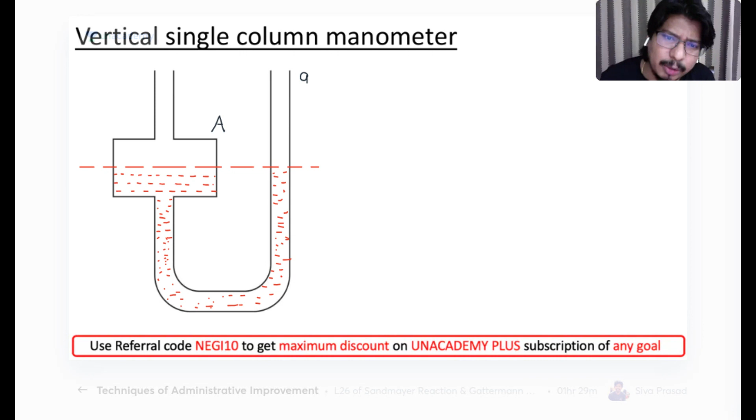Both limbs means on the right hand side limb and in the big reservoir. The moment I use the term reservoir, what is the meaning of this? Let me say the area of this reservoir is capital A, and the area of this right side U-tube limb is small a. So small a is very small as compared to capital A. What is small a? I will tell you that too.

Look here, friends. Let me say this diameter is d. Then small a will be equal to pi by 4 times small d square. It can be anything - I'm assuming I'm having a cylindrical right limb, so it will be pi by 4 d square.

Now listen carefully, from here the concept will start. Look here - let me say this distance is x. So whenever we are manufacturing this vertical single column manometer, we are aware of this x.

This initial level, you know. Once you know this initial level, you can easily measure how much x will be. So x is fixed - remember, x is not variable. This x is the distance of the top level from the manometric fluid level in the reservoir. So this x is fixed, don't worry about it.

Now let us see how we are going to measure the gauge pressure with the help of this vertical single column manometer. For that, let us try to attach this vertical single column manometer to the pipeline. So when attached to the pipeline, it looks like this.

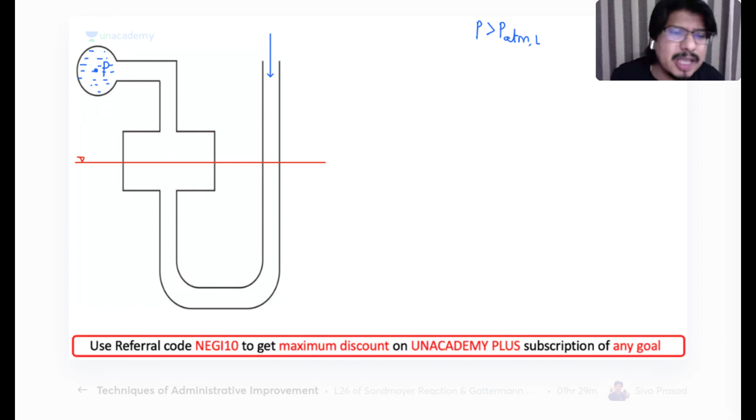Let us suppose I'm talking about positive gauge pressure. The fluid which is flowing in the pipe has pressure P, and from here I'm having local atmospheric pressure. My question is simple: if P is greater than P atmospheric local, what will happen to the manometric fluid in the right limb? Will it rise or will it fall?

One student says fall, but actually the pressure is more here, so on the right limb it will rise. The manometric fluid in the right limb will rise.

So this has risen. Let's suppose it rises, and let me say this rise is h. Fine, now listen carefully.

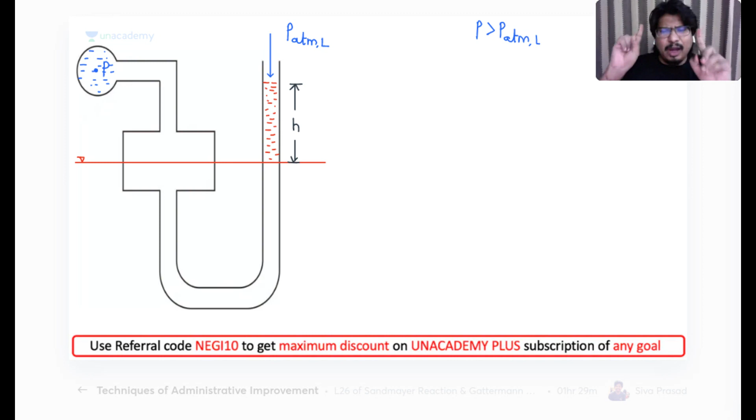What will happen to the level of manometric fluid in the reservoir? What will happen in the reservoir? Yes, there will be some fall.

Let me say the new level is like this. There will be some fall. Listen carefully, I hope you are able to recollect.

This distance was x, this distance was x, which is fixed from the initial level I'm taking. I hope you are able to recollect this is x.

Now listen carefully, my friends. The manometric fluid will now be like this.

In this final position, when the vertical single column manometer is getting attached to the pipeline, what is happening on the right limb? The manometric fluid is rising, whereas in the case of the left side reservoir, manometric fluid is falling.

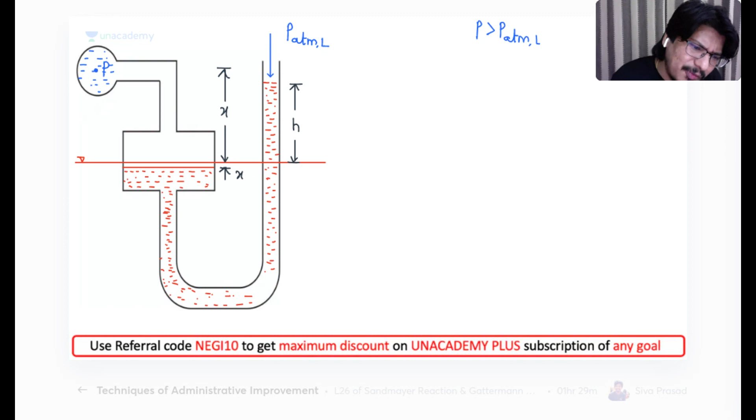A little fall, we will see that. And of course, now what will happen? Here I will be having this flowing fluid. Now you'll be having this flowing fluid only.

Now listen carefully, please try to understand what I'm saying. I want to measure what is the value of gauge pressure, so I have to draw one reference plane.

Anyone in the class, where will the reference plane come? Yes, it will be somewhere here. This is your reference plane.

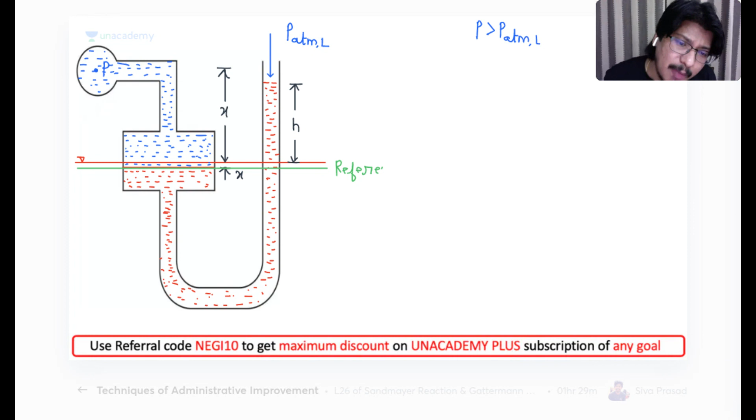Now you tell me one thing. Can you tell me whatever the volume rise I'm having?

Look here, this manometric fluid rise is taking place. What is the relation between this volume rise and this volume fall from the initial level? They will be same, they will be equal.

Yes, so volume rise is equal to volume fall. What is the volume rise? Small a into h. What is the volume fall? This reservoir has cross section area capital A into what?

Instead of x, this is delta h. So the volume fall is capital A into delta h.

Now can I say from here one thing? Can I say delta small h is equal to small a divided by capital A, into h? Now can I say one thing?

Small a is very less as compared to capital A. Can I say that? Yes, excellent, beautiful. I want everyone to type this.

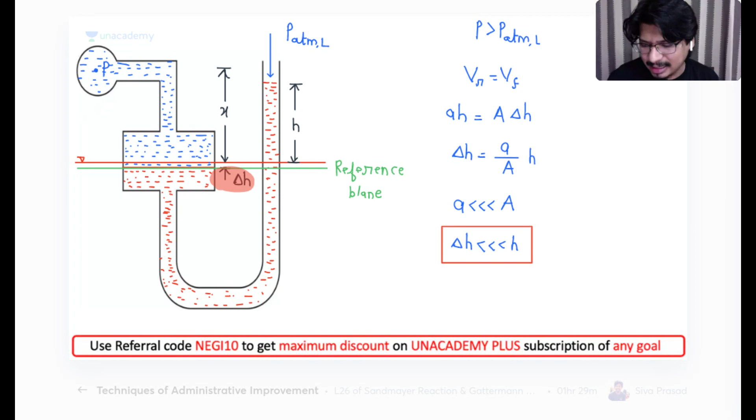Now pay attention. Now I'm taking 2 points. I'm taking 1 point in this reservoir at the interface, and I'm taking another point here on the right limb.

If the pressure at point 1 is P1 and the pressure at point 2 is P2, what will be the relation between P1 and P2? Yes, they will be equal. So I can write P1 is equal to P2.

Can anyone in the class tell me what will be P1? Think carefully and answer me. Look here, pressure is P here, pressure will be P here, due to this column of the flowing fluid.

I have told you clearly, we will be taking the density of the flowing fluid as rho f, and the density of the manometric fluid as rho m.

So tell me, P1 will be equal to what? P1 will be equal to P plus pressure due to this column up to point 1. So what is the length of this column of the flowing fluid up to point 1? It is X plus delta H. Don't neglect delta H right now.

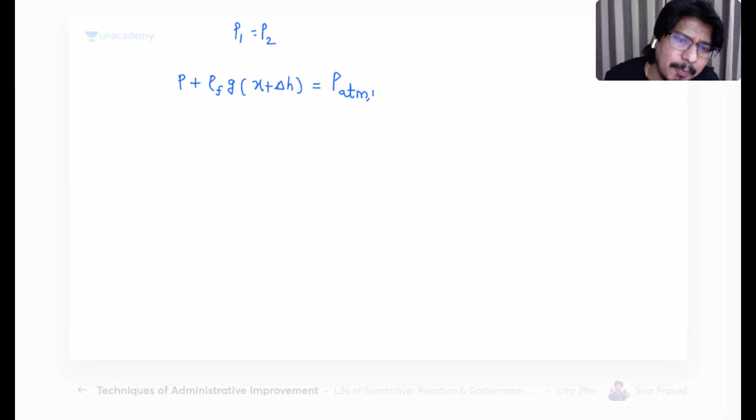So how much is the length of this manometric fluid? It is H plus delta H. So what I'm getting is P atm local plus rho m g times (H plus delta H).

So if I want to find gauge pressure, it will be P minus P atm local. These questions they ask in GATE exam and Engineering Services exam, so be careful. So P minus P atm local is equal to rho m g (H plus delta H) minus rho f g (X plus delta H).

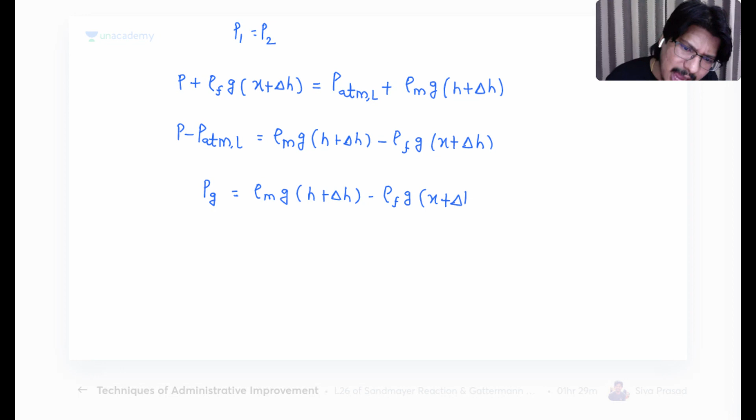So the exact reading of the gauge pressure is rho m g (H plus delta H) minus rho f g (X plus delta H). I hope everyone is clear with this exact reading.

But in industry, they are not following this. They are saying we are happy with a little bit of error, no problem, we just want only one reading to work with, not multiple readings. Then I told them: go and tell them to neglect delta H, since delta H is already very small.

So neglecting delta H, what is the gauge pressure reading now? It becomes rho m g H minus rho f g X, since they are neglecting delta H. Now they are very happy.

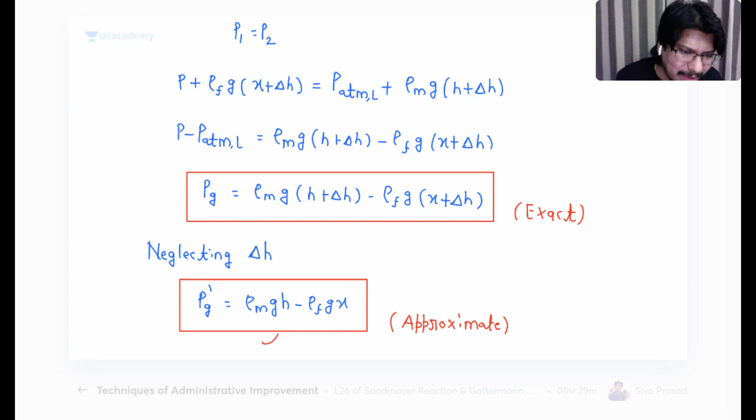Can you tell me, for measuring the approximate gauge pressure, what is the only reading required? X is already known, so you need only and only one reading. There is only a single reading required.

I need, you already know X. You need to take the reading of H only.

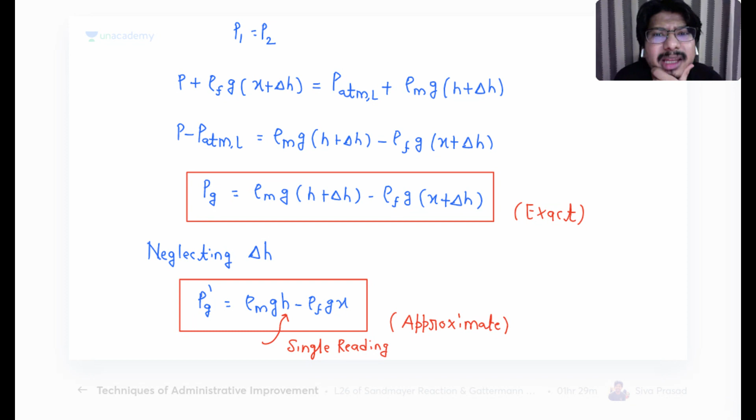The industry people got a bit doubtful. Small error means what? How much error? I don't know anything, he came running to me. Negi sir, they are asking how much error. What can I say? Then I told, no problem, Pritam Pyare.

Give me 1 hour, I will be telling you how much percentage error. I started thinking, yes Pritam Pyare, the solution came. How to find the percentage error, Pritam Pyare? I will be telling you, you just tell the same thing to them. So how will we find the percentage error?

See, how much will be the error? Error is actual gauge pressure. If you see, error will be how much? Actual gauge pressure minus approximate gauge pressure. Okay, how much is the actual gauge pressure?

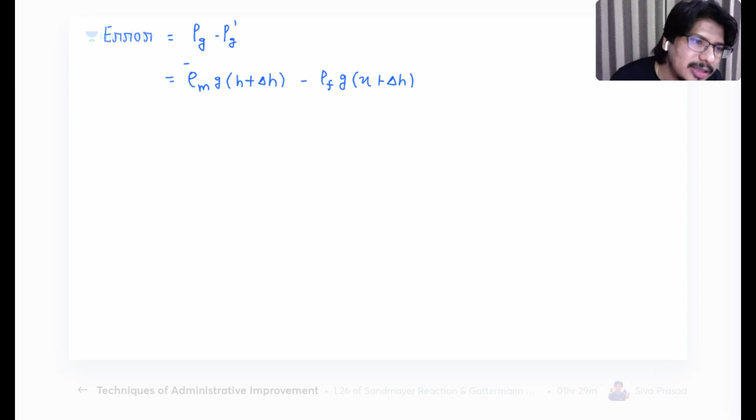Rho m G H plus delta H, rho m G H plus delta H minus rho F G X plus delta H. This is the actual gauge pressure minus what? Approximate gauge pressure: rho m G H minus rho F G X.

This is the approximate gauge pressure. So of course we can easily calculate how much is the error. How much will be the error, my friends? Can you tell me? This will be getting cancelled, this complete will be getting cancelled with this X and H only.

So what I'm getting? Error is equal to rho mg delta H minus rho fg delta H. So the error is rho m minus rho f, g delta H.

Now if you want to find percentage error, see how percentage error will come out. Error divided by what? Error is rho m minus rho f, g delta H, divided by the actual reading. How much is the actual reading? Rho m g H plus delta H, minus rho f g X plus delta H, into 100.

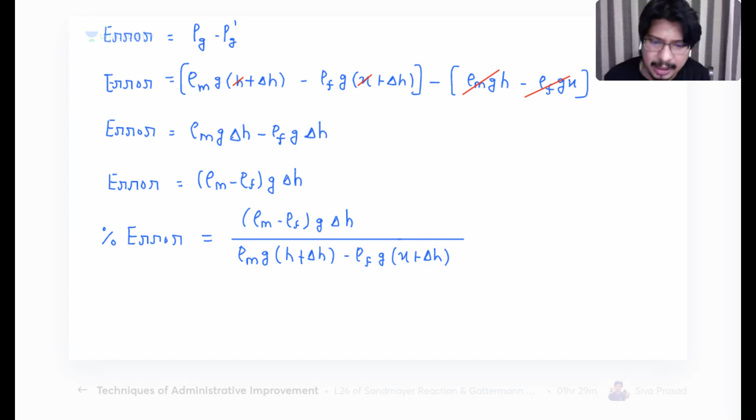And that's how you are finding the percentage error. I hope everyone is clear with this. This is the exact value of percentage error.

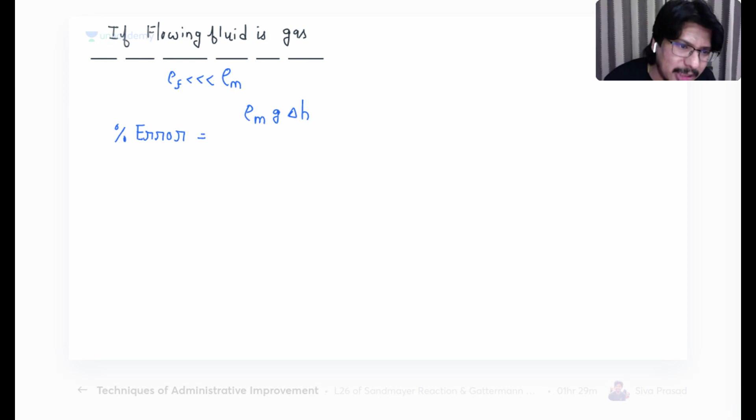Tell me, is it understood? Rho m g delta h divided by what? Rho m g h plus delta h.

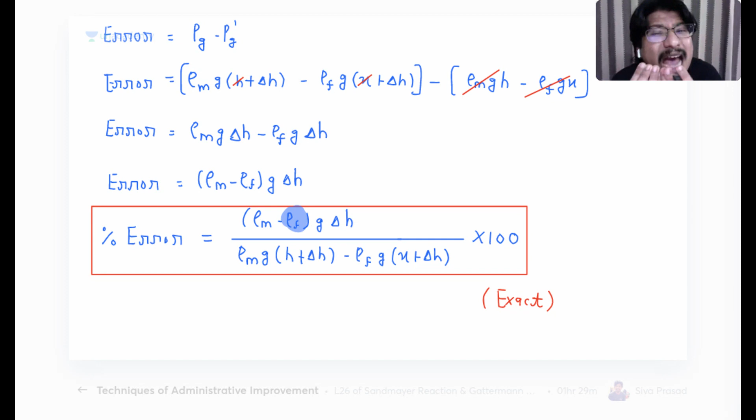You can observe one beautiful thing. Look here. Since flowing fluid is gas, it will be having very negligible density compared to the rho m manometric fluid density. So this gets neglected, so I'm getting rho m g delta h divided by rho m g h plus delta h. So what is happening here? Rho m g gets cancelled. So the percentage error is how much? Percentage error I'm getting as delta h divided by h plus delta h.

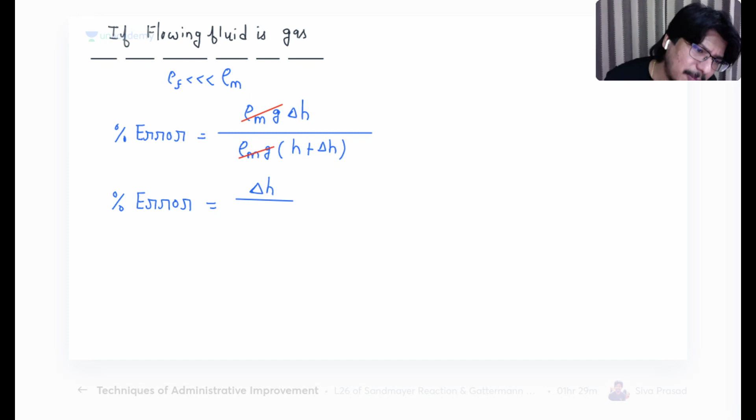And this formula of percentage error for the gas is almost exact. This is, I will say, almost exact.

Now I can do one more thing. Please understand, I can do one more thing. Let us suppose I can write one more thing: delta h is very small as compared to h.

So if I neglect this delta h here, then I will be getting the approximate error. So what will be the formula of percentage approximate error? Oh my god, delta h.

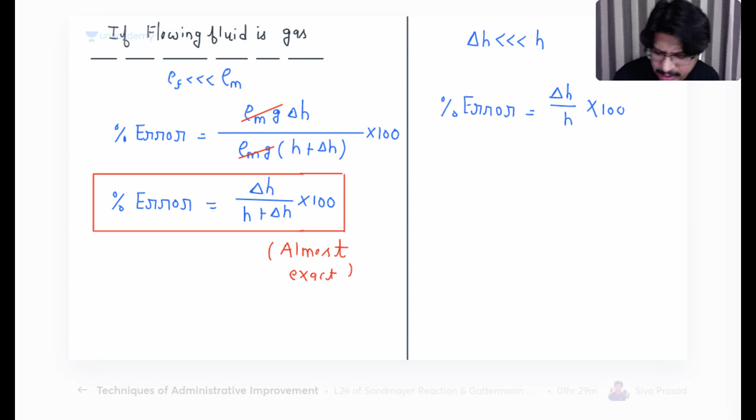Oh my god, look at here, percentage error will become delta h divided by h into 100. I'm not saying this is exact, but this is the approximate error formula. Now listen carefully, why am I saying this? I have told you one thing before. Can I write capital A into small delta h? This is equal to volume. Can I write small a into small h?

So what is the value of delta small h by h? Anyone in the class? This will be equal to small a divided by capital A. So can I say percentage error is equal to this?

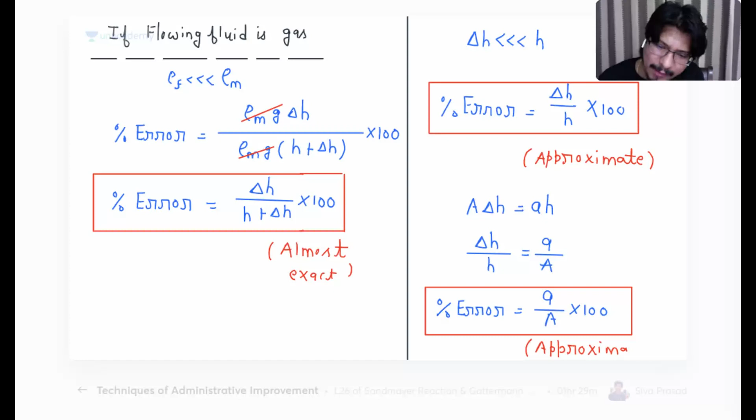इसका मतलब क्या हो गया। एग्जाम में क्वेश्चन कैसे पूछेंगे, आपको समझ में आ रहा है? आपको स्मॉल ए दे देंगे, कैपिटल ए दे देंगे, and they will be asking you, if the flowing fluid is gas, how much will be the percentage error in the reading. If you don't know this, you won't get anywhere. If they are asking, let us suppose I am having some single column manometer connected to some pipe where some gas is flowing. Now let us suppose I am taking the measurement of the gauge pressure, there will be some error.

100%. Can you tell us what will be the value of approximate error if they are giving you small a and capital A? Small a by capital A into 100 will give you the approximate error. And this question has been asked in GATE exam already. किसी को समझ में नहीं आया, अरे क्या करें कुछ दिया ही नहीं, स्मॉल ए कैपिटल ए क्या किया जाए। अरे यही तो करना था, स्मॉल ए बाय कैपिटल ए इनटू 100, बस इतना सा कॉन्सेप्ट था। लेकिन याद रखना, this is valid only and only if the flowing fluid is gas. Is it clear to everyone?

झमाझम कॉन्सेप्ट, आर यू क्लियर? मजा मजा मजा मजा, excellent excellent excellent। Is it clear to everyone? Are you clear till here? Excellent excellent, very good very good।

फुल एंटरटेनमेंट है रे बाबा, आज तो फुल एंटरटेनमेंट। लोग बोलते हैं प्रेशर मेजरमेंट बहुत बोरिंग टॉपिक होता है सर, इसमें तो कुछ समझ में नहीं आता, इसमें समझना क्या है, बस डायग्राम बनाओ, इक्वेशन लिखो। देखो, मैं आपको एक एक चीज पूरा डिटेल में बता रहा हूं।

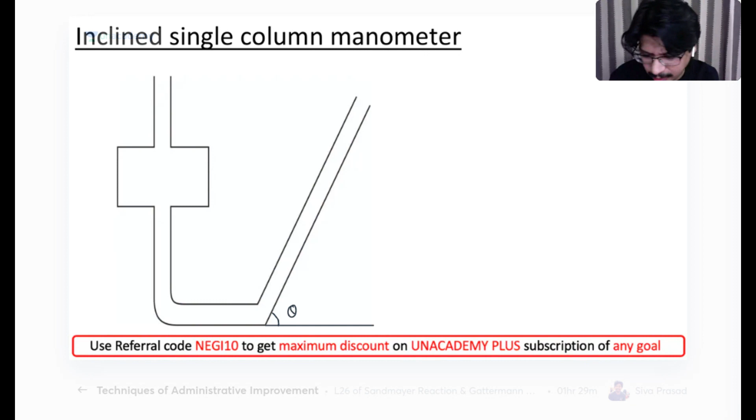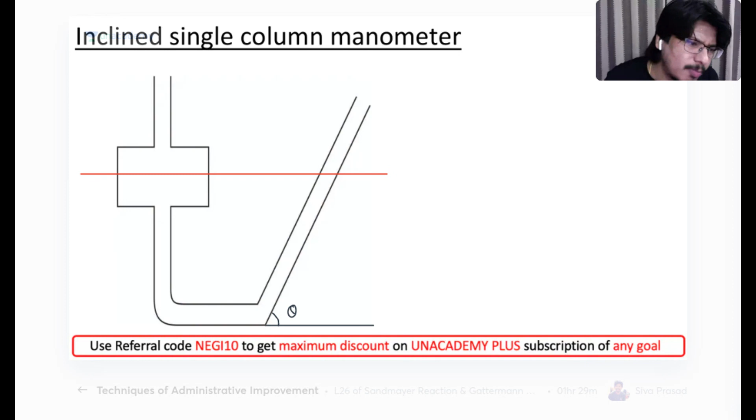Let me say I'm having the manometric fluid filled maybe something like this, so this is the initial level of the manometric fluid. You can observe your manometric fluid will be like this in both the limbs, at equal level, my friends.

Can you tell me how much will be this? This is how much, this is X. This is X, and this is what? This is already fixed.

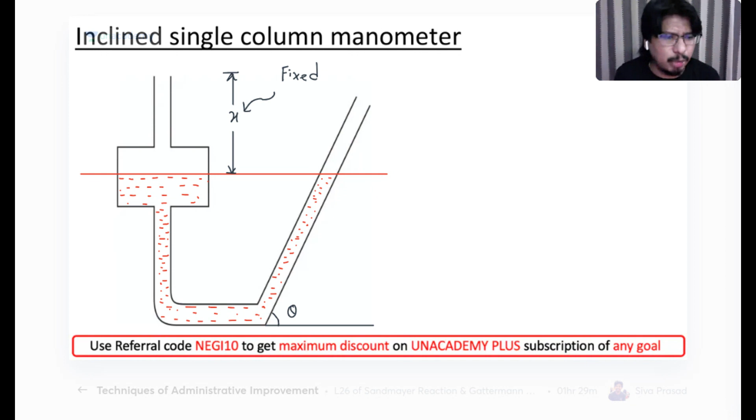Now let us suppose I'm connecting this inclined single column manometer to the pipeline. This is the pipeline we are having, and I have connected our inclined single column manometer to the pipeline.

Now listen carefully. Let me say in this pipeline there is some fluid which is flowing, and this fluid is having pressure P. Of course from here the local atmospheric pressure will be acting, PATM local will be acting from here. Now look at here, what is going to happen?

First let me see how the initial level was earlier. It was maybe something like this. Now what will happen? Please observe, this is the initial level.

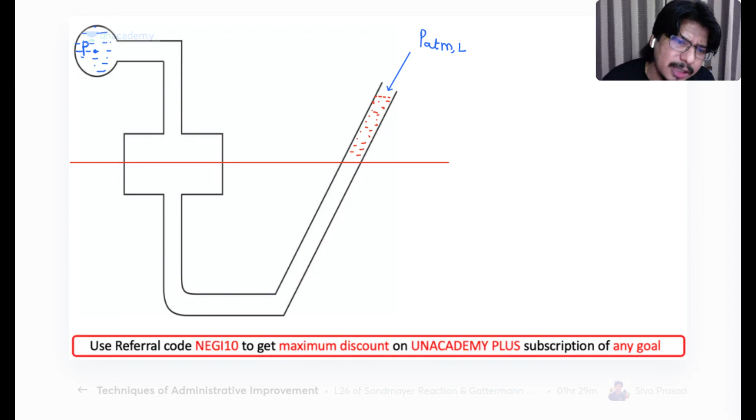Now of course you know what is going to happen, my friends. 100% there will be some rise of the manometric fluid on the right side inclined limb, and 100% there will be some fall over here on the left side.

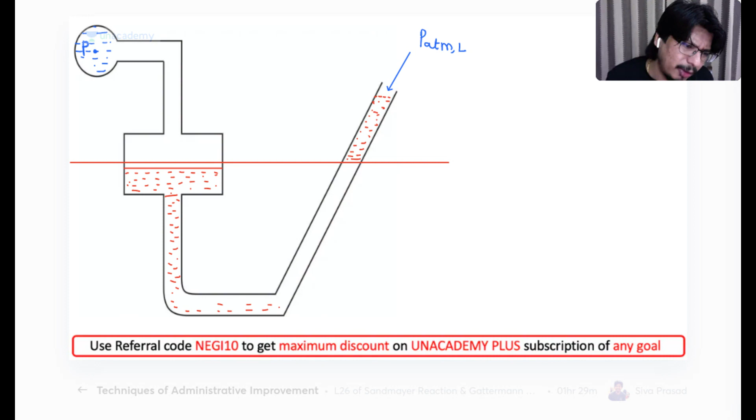Now let me say situation is like this: on the left side reservoir there is some fall, on the right inclined limb there is some rise. I will be taking the distances also. This is the manometric fluid - whenever I'm drawing with red ink, you must understand I'm talking about the manometric fluid. This is the red color manometric fluid, and this is your flowing fluid, which will come up to here.

Keep observing carefully, keep beautiful observations you will get. Now you will come to know the concept of why we are inclining the limb. I will be telling you.

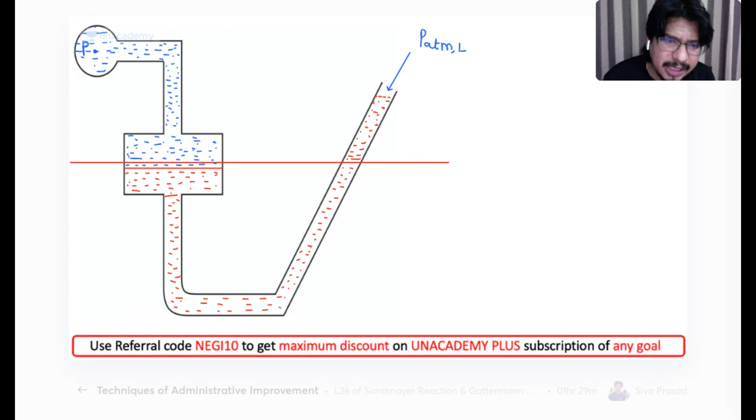Listen carefully first. Let me say this is H. Let me say this distance is L.

Now let me say, you know, how much is this? Can you tell me how much is this? This is how much? This is X. Let me say delta small h.

Now I hope everyone is crystal clear. Where are we going to take the reference plane? We will be taking the reference plane somewhere here. This is our reference plane, there is no doubt.

Now listen carefully. Are you able to understand one thing? If I measure PZ, if I try to write the equations, can you observe? PZ will be coming same like this.

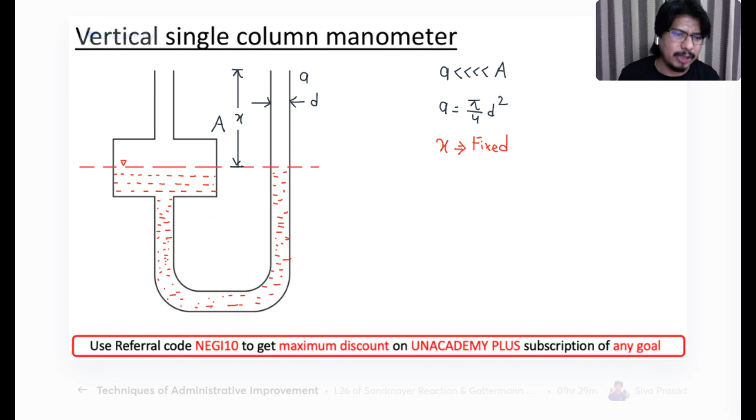The vertical distance is the same, so PZ will be the same. I will be taking two points - one point here, and another point here.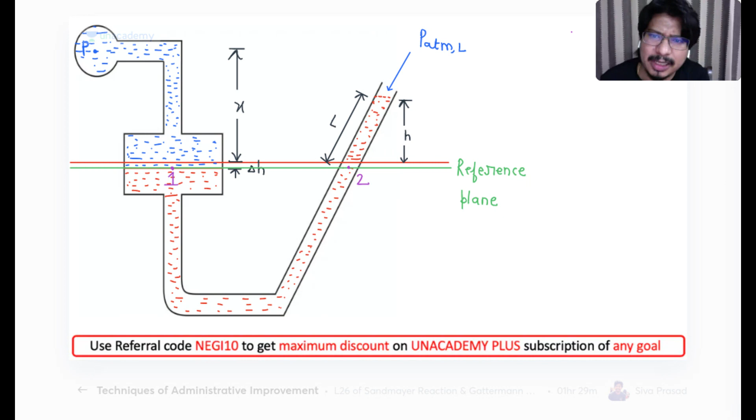100% P1 is equal to P2. If P1 is equal to P2, I can write P1 is equal to P plus rho f g x plus delta h.

And what will be P2? For P2, will you take L or H? What will P2 be? Do you think P2 will be equal to P atm local plus rho m g L plus delta H?

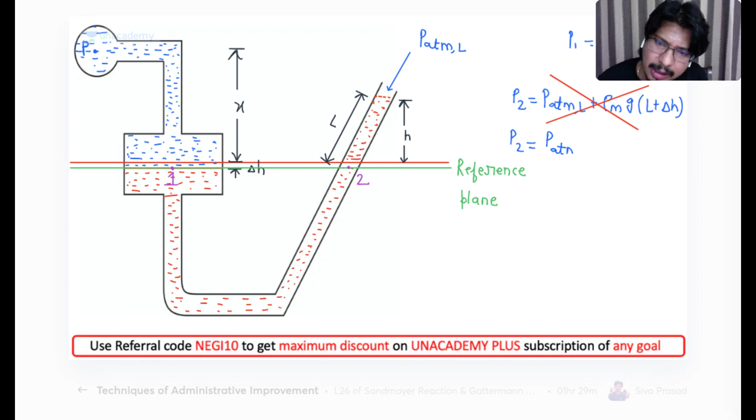This is wrong. It won't be L plus delta H. L is the inclined length - you should not take the inclined length. So P2 will be equal to P atm local plus rho mg H plus delta H.

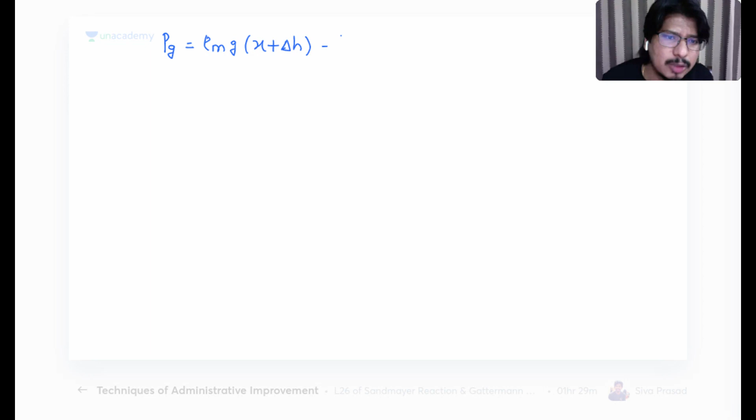So what I'm going to get is Pg is equal to rho mg H plus delta H minus rho FG X plus delta H. This is the exact measurement.

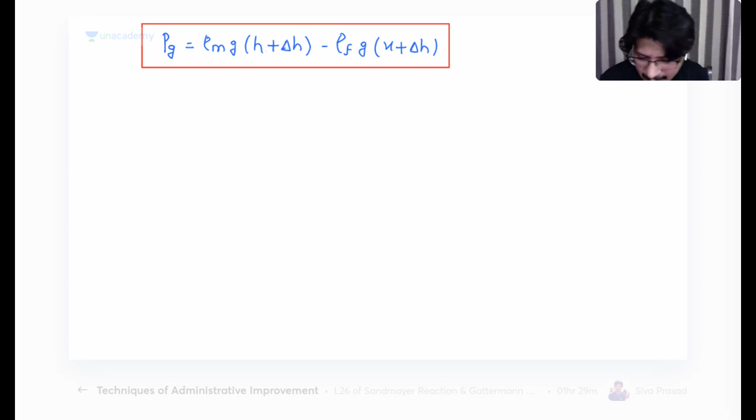What is the difference? I will tell you - give me a minute. Here H will come, here X will come - H plus delta H, X plus delta H. This is the exact reading, but I'm not interested in this.

Now listen carefully - neglecting delta H, what will happen? What value of Pg will we get? Pg will be equal to rho mg H minus rho FGX.

Now look here, the main difference is coming. I'm not getting the reading in terms of H. Whatever reading you are measuring, is it in terms of H or in terms of L? You are taking it in terms of L.

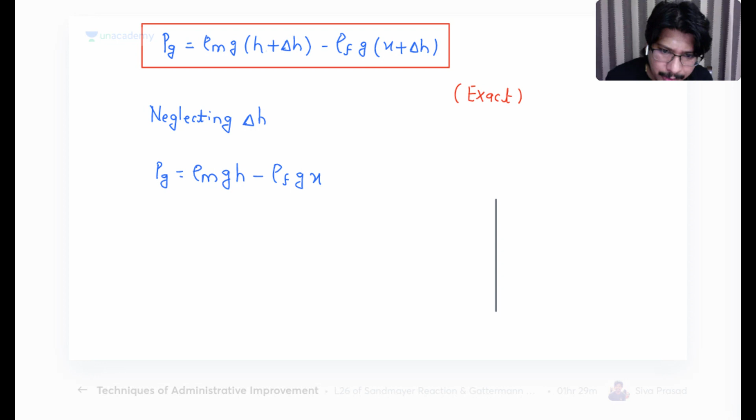What is the meaning of this? Try to understand - let me explain. I will draw a triangle for you. Look at the triangle once - this angle is theta, this is H, this is L. Anyone in the class, what will sin theta be?

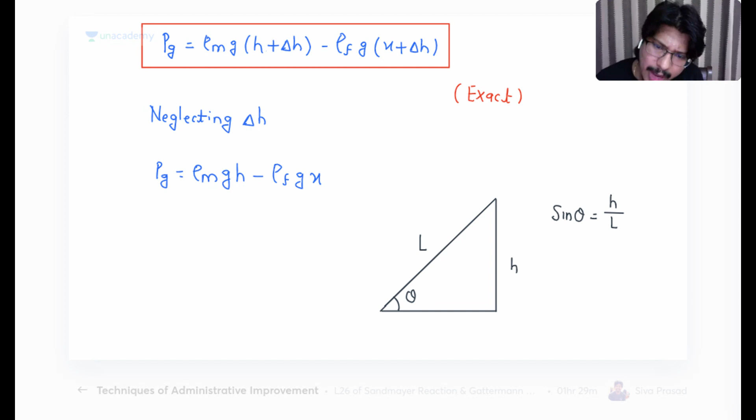What will sin theta be? Sin theta will be H by L. So H is equal to L sin theta. Now what does that mean?

Here the change will come. Pg is equal to rho mg L sin theta minus rho FGX. Now this is the value of Pg dash which we are getting. Of course there is some error - this is approximate, but in industry we are using this.

Now can you tell me how many readings I need for measuring the approximate gauge pressure? This X is fixed, sin theta is also fixed, and this angle of inclination theta is fixed. So when theta is fixed, sin theta is fixed. I need only one single reading.

I hope you are able to understand - I need only a single reading. And this single reading is coming on which limb? Vertical limb or inclined limb? It is coming on the inclined limb. Yes, that is the reason why such a single column manometer is known as an inclined single column manometer.

Now you must be wondering, sir, when we already had the vertical single column manometer, then why did we come up with this concept of inclined single column manometer? I will tell you that history.

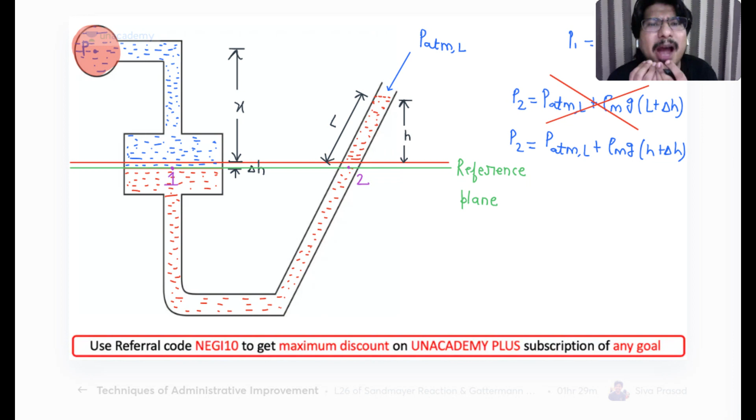Everyone knows Nangu is a loyal employee - he will not waste any time. Whatever work you give him, he will do it and take excellent readings. But what happened? When the gauge pressures were less, Nangu was having some eyesight problem. When the gauge pressure was less, the readings were coming at a very lesser height - the rise, this H value, was very small. When the H value was very small, Nangu was not able to see the readings properly.

And here the drawback of Nangu came into the picture. He was having some eyesight problem. For big readings, no problem, he will take. Reading is 10 centimeter, yes. 10.5, yes Nangu. 9.5, yes Nangu is taking the reading. But when it is coming to very less values, maybe 5 mm, Nangu is not able to take the reading carefully. He's doing some error.

Then industry people again called Pritam. Pritam Pyare, you give us the solution for this. Nangu is okay, we are not having any problem, but Bechara Nangu is having eyesight problem. Do something for this. Then Pritam Pyare came to me.

Negi sir, this is the problem. Vertical single column manometers, yes, it is very good. But when the gauge pressure is very small, this H value is very small. If this H value is very small, Nangu is not able to take the reading properly. Then I told him, Pritam Pyare, let me think for 1 hour. Give me 1 hour. Okay.

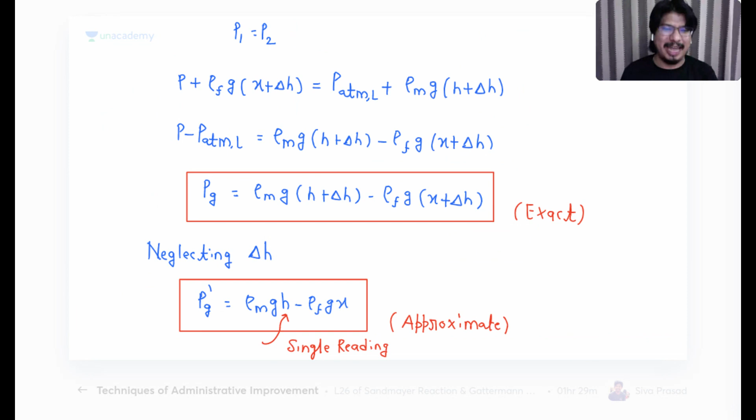Then I came. Pritam Pyare, we will do one thing. Sir, what? We will be inclining the vertical column. We will make it as inclined single column manometer. Pritam Pyare is asking me, sir, what will happen? Pritam Pyare, see it, I will be telling you. Why are we inclining this? Look at here, my friends, try to understand. Let us suppose.

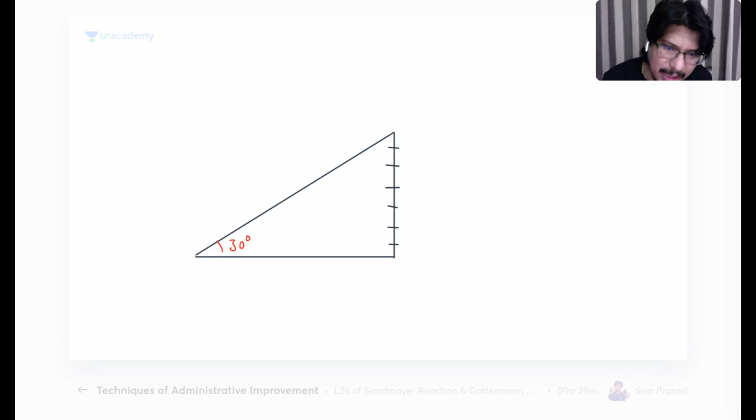Let us suppose 1, 2, 3, 4, 5, 6, 7. Let us suppose the reading is 3.1 mm. So let me say this angle is 30 degree. I hope you are able to understand. If this is 7 mm, if this scale is of 7 mm, I'm taking the example. Then 100% would be 14 mm scale. 14 mm scale I will be getting here.

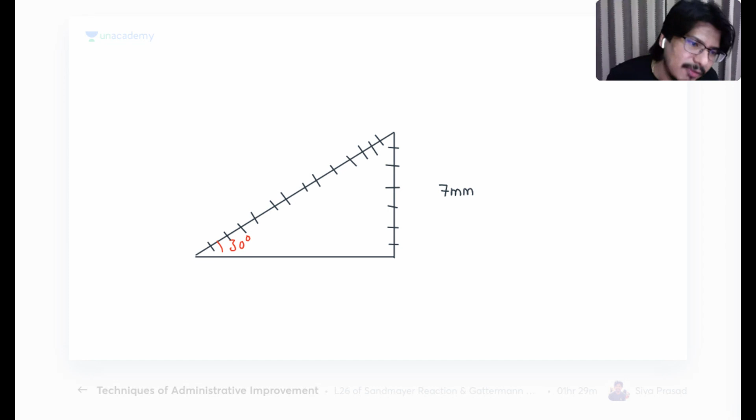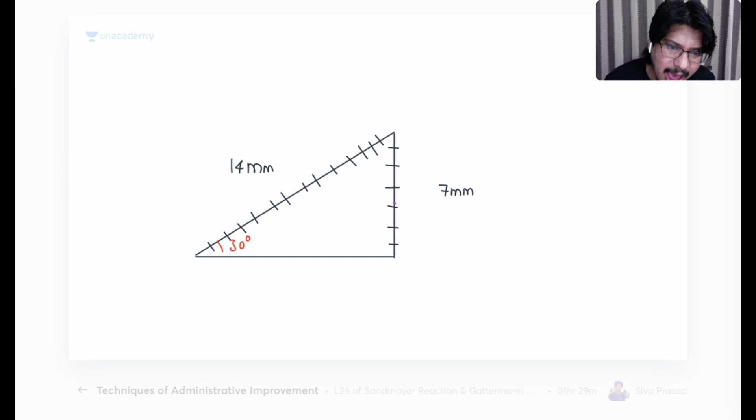Now, what is the meaning of this? Let us suppose Nangu is taking the reading of 3.1 mm. 3.1 mm will come here. Now, since look at here, actual reading is 3.1 mm. But Nangu is having eyesight problem, so he is reading this 3.1 mm as 3 mm. Because of Nangu's eyesight problem, he is not able to see this 0.1 mm properly. He told, sir, the reading is 3 mm.

So how much is the error? Error kitna hai? Actual reading is 3.1 mm. He is reading 3 mm. So error is 0.1 mm. How much is the percentage error? 3.33% error.

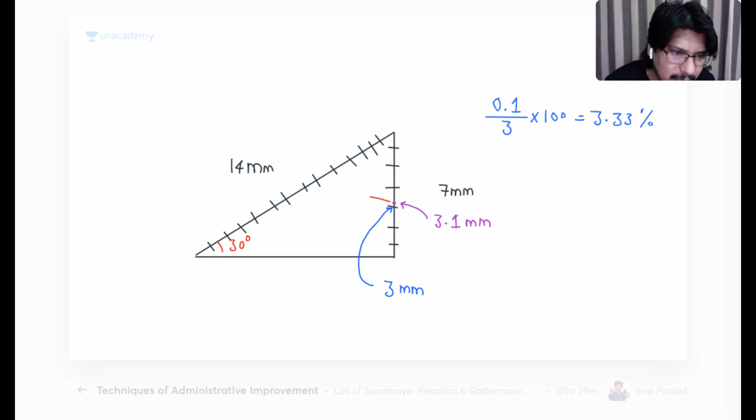Now look at here, this 3.1 mm reading, I hope you are able to understand. This 3.1 mm reading on inclined limb, it will become how much? 6.2 mm, it will become 6.2 mm na? Whatever the actual reading I am having as 3.1 mm on vertical single column manometer, on inclined single column manometer, how much will be this? 6.2 mm. Now Nangu is committing the mistake of 0.1 mm.

So let us suppose Nangu is taking the reading and he is reading 6.1 mm. He has committed the mistake of 0.1 mm error, is reading 6.1 mm. Now how much is the error? Approximately 3.3, let's take that value. Now how much is the error here?

How much is the error committed by Nangu? Same error. But how much is the percentage error now? 1.61. How much? 1.61. Divide it by 2, it will become half. 3.3 ka half kitna hoga? 1.65 approximately. Chalo maan lo, let me say approximately this much. So what is happening to the percentage error?

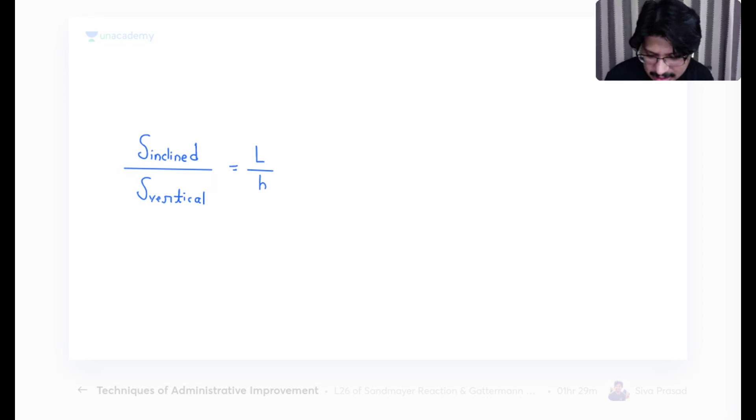Sensitivity of inclined column single column manometer divided by sensitivity of vertical single column manometer, that will be equal to L by H. Because in inclined single column manometer we are taking the reading L, in vertical single column manometer we are taking the reading H.

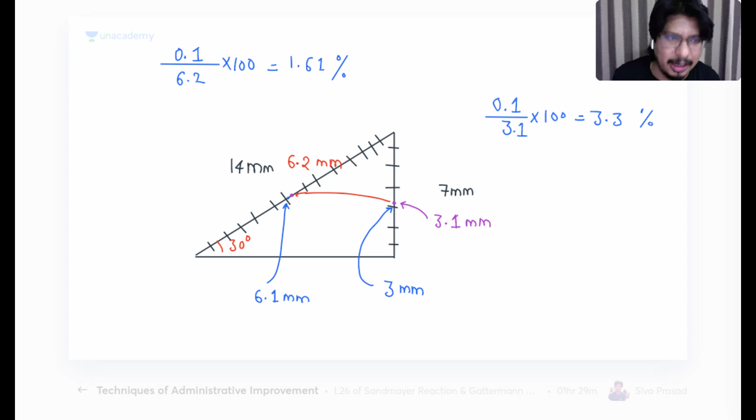See, what was the relation between H and L? H is equal to L sin theta, or sin theta is equal to H by L. If sin theta is equal to H by L, then what will be L by H? L by H is equal to 1 by sin theta.

So that means sensitivity of inclined single column manometer divided by sensitivity of vertical single column manometer is equal to 1 by sin theta.

Tell me, will 1 by sin theta be more than 1 or less than 1? 1 by sin theta will be 100% more than 1.

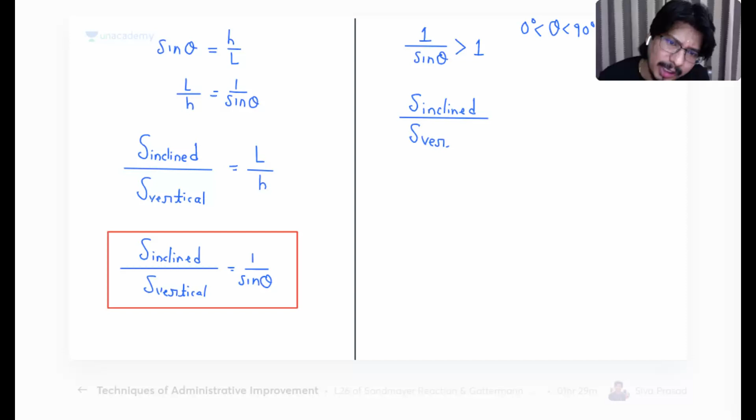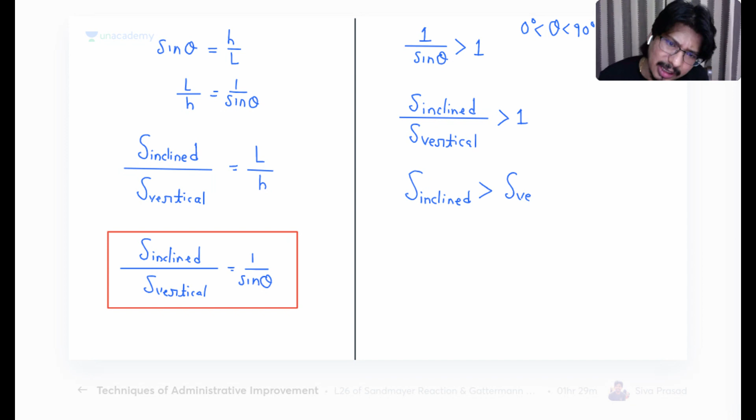In the worst case, when it is vertical, it will become 1. For theta less than 90 degrees, greater than 0 degrees, it will be more than 1. That means sensitivity of inclined single column manometer divided by sensitivity of vertical single column manometer will always be more than 1. That means sensitivity of inclined column manometer must be greater than the sensitivity of vertical single column manometer, and that is the reason we are inclining the vertical column.

Yes, let us have some conclusions. Inclined single column manometer is used to measure low pressure. Using the inclined limb, reading comes in terms of L, which is more than H, hence reading error decreases. Percentage reading error decreases, and sensitivity increases by 1 by sin theta.

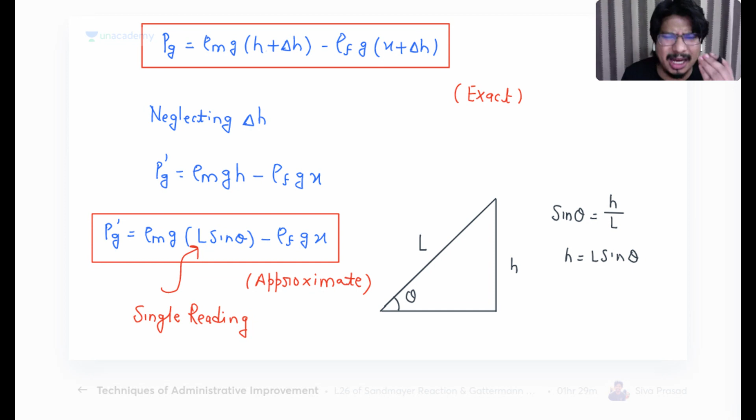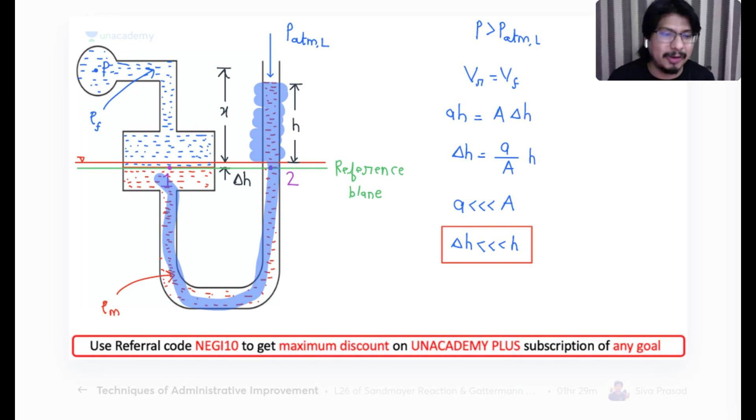What is happening? Are you able to understand what is happening here? At very low pressure, this H becomes very small. Can I do one thing? Can I change the manometric fluid? Can I use a lighter density manometric fluid? If I'm using the lighter density manometric fluid, what will happen? The value of this deflection, the value of this H, will increase.

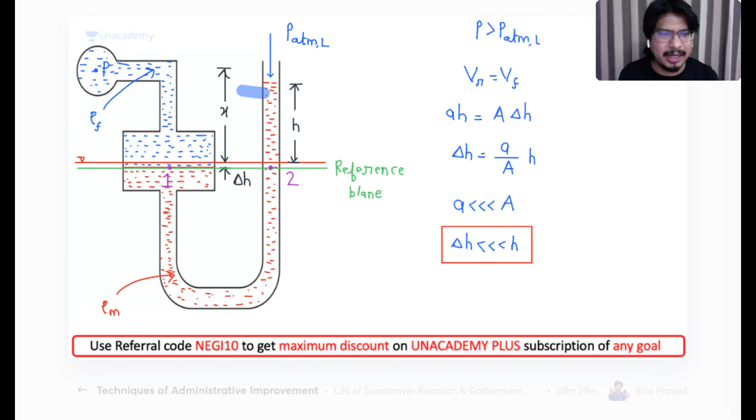So this is another method. There are two methods of increasing the sensitivity. What is the meaning of increasing the sensitivity? I'm increasing this reading, I'm increasing the reading value. So one method is you incline the vertical single column. Another method is you change the manometric fluid. You will be able to get the higher reading.

Is it clear to everyone? Is it clear to everyone? Are you crystal clear with the concept of single column manometer also?

Now look here, we have discussed the piezometer, we have discussed the U-tube manometer, we have discussed the single column manometer, we have discussed the vertical single column manometer, we have discussed the inclined single column manometer. Are you clear till here? You will solve lots of problems in the evening. In the evening 4:30 session, I will be solving the problems. I will make sure you are able to understand all the problems.

At 3 p.m. we will discuss the differential U-tube manometers and inverted U-tube differential manometer. Yes, you need to learn differential manometers too. So many questions come from this. From manometry, from these manometers, you will be having so many questions in GATE exam and engineering service examination.

Today's class is very important. Today's class, I'm very happy. Till now, 150 plus students are live. If everything goes well, maybe at 6 p.m., are you happy?

Maybe at 6 p.m. I will be keeping the class of hydrostatic forces. But I request you, please maintain attendance. If you don't maintain attendance then it will become difficult. Are you ready for the curved surfaces?

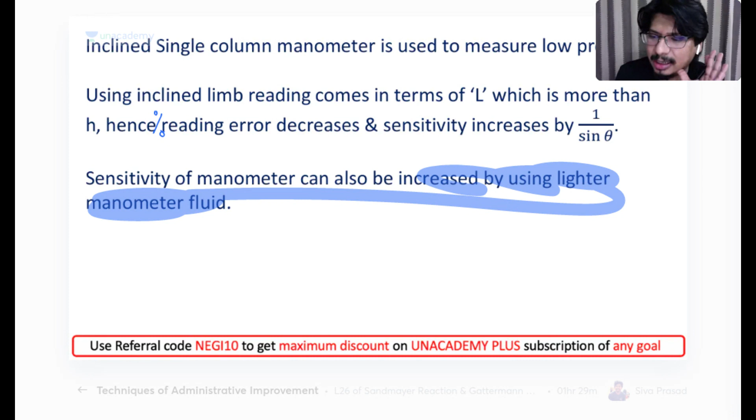Let's see - if attendance is maintained, if at 2 o'clock we are having more than 200 students, definitely we will plan the extra class. Okay, 3 o'clock. Let's see, this is down, this is also down. Now we will be meeting at 3 p.m., then 4:30 p.m., then 8 p.m. Okay, we will see about the extra classes. Understood? Oh my God.